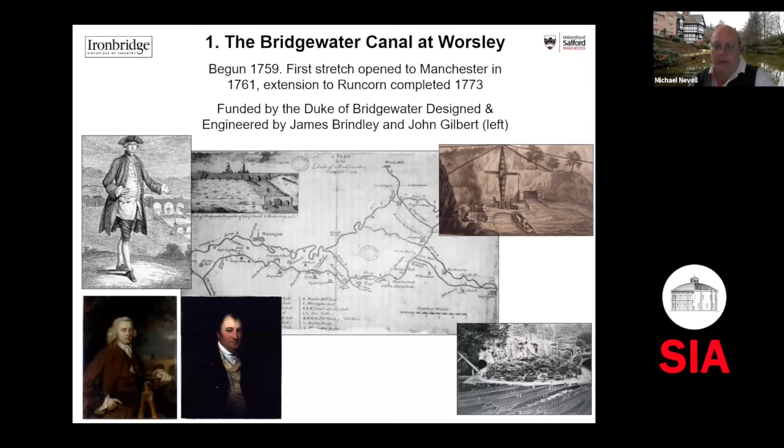And this became a tourist attraction. It opened to Manchester in 1761, and was later extended another 30 miles down the Mersey Valley towards Liverpool and opened in 1773. As soon as it was opened, people came to look at the mines, and they were looking at the canal itself. This is a contour canal with no locks until you get to Runcorn, but it's a canal that goes underground. There are 80 kilometres, 52 miles of underground canals. And this is one of the first coal canals where we get such extensive underground canals.

The way it's developed over 100 years is we end up with three major levels stretching on the surface from Worsley northwards towards Bolton, which is sort of 5 or 6 miles to the north of Worsley. But the underground canals themselves extend far further. And the volumes of coal coming out of here are quite significant. So in the late 18th century, we have 100,000 tonnes of coal a year coming out of those underground mines, and that leaps to 200,000 in the early 19th century.

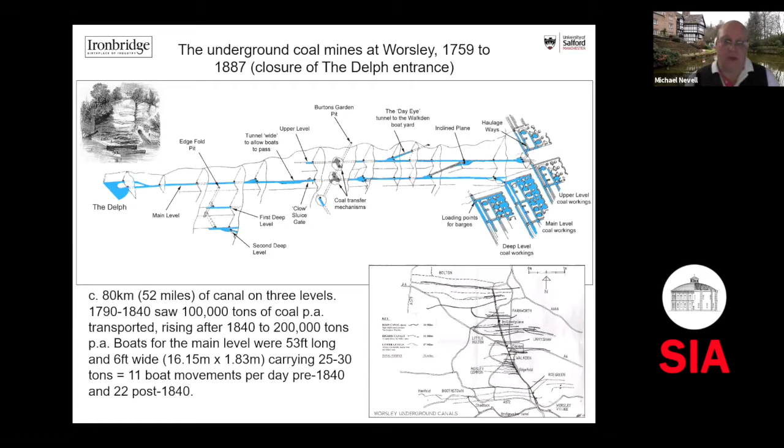And if you think of those in terms of boat movements, we're talking about perhaps a dozen boat movements going into the mine and another dozen coming out in the late 18th century, and double that by the 1840s. Now that's important because the way those boat movements were managed is reflected in the entrance to the mine. This is part of the entrance to the mine. This is Worsley Delph. It's protected as a scheduled ancient monument in the UK, and it's also listed as well. It's one of those iconic monuments of industrialisation we get in Britain.

Every industrial region in the UK will claim they're the home of the Industrial Revolution. This is Salford's claim to being the home of this part of the Industrial Revolution. As you can see here, the canal comes into the basin and the entrance to the mines, and it's very much overgrown and silted up. And this was the view in the mid-2010s, at which point Salford city teamed up with the owners of the canal, because the Bridgewater Canal is unusually in the UK still a private company.

It didn't get nationalised in the 1940s for reasons I won't go into at this point because we haven't got time, to set up a series of improvements to the canal, particularly to bring the public down into the basin here, the terminus, so that the public can see how the coal boats enter the mine.

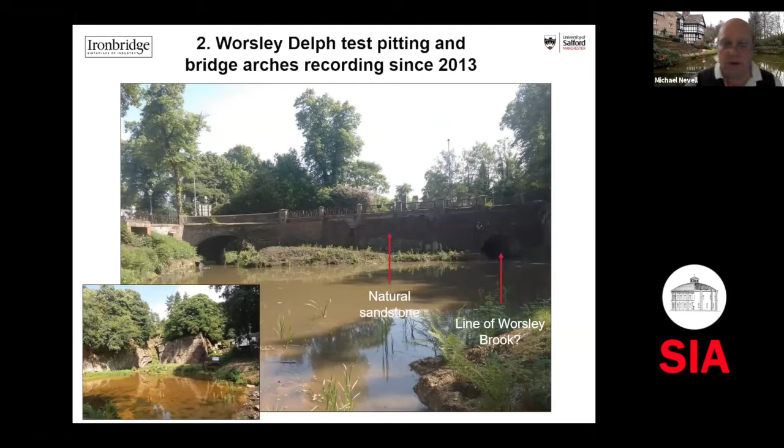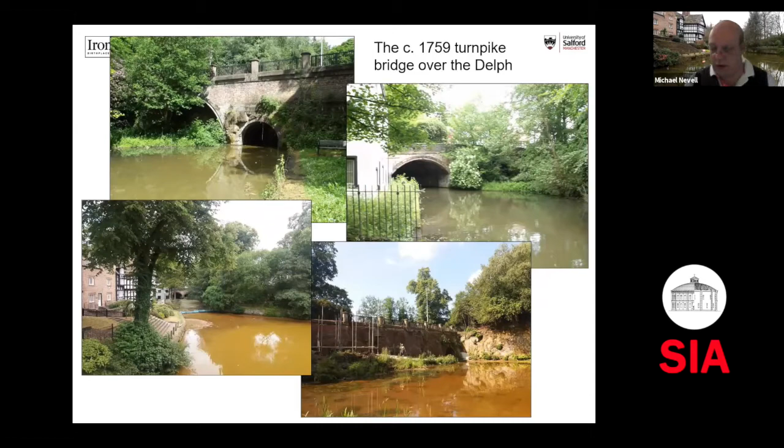Now, in order to renovate that involved works on the 1750s turnpike bridge that runs across the Delph itself. Delph is a Middle English word meaning quarry, and in fact this part of the canal uses the waters of Worsley Brook to provide, if you like, a basin and access underground into the coal deposits. And the bridge was originally built across the line of the Worsley Brook, and then later on it's expanded to cross the line of the canal.

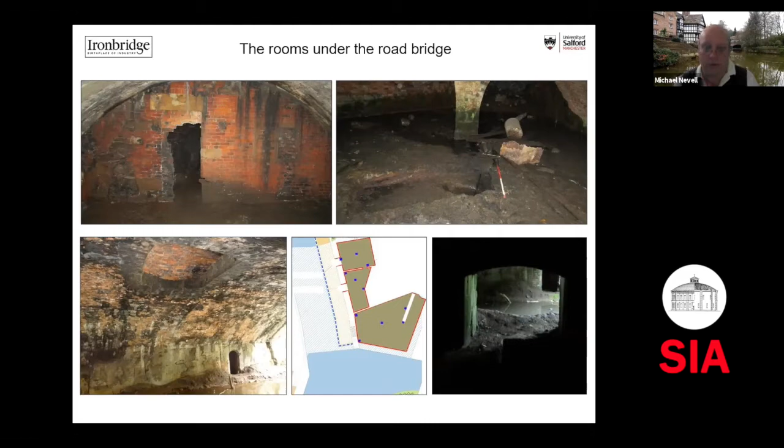And consequently, under that bridge, there's a whole series of rooms and access points, which at one point we thought we might be able to use as a heritage centre, but it proved impractical. But these are rooms that were built under the bridge in order to control boats coming into and out of the Delph area, into and out of the mine. And also there's access to the local corn mill, which from the late 18th century was steam powered, using coal directly from the mines. And you can see some of the archaeological fieldwork we did surveying the bridge here.

Once we got into the Delph in 2018 and 2019, the major focus of the archaeology was around the building of a new viewing platform on the eastern side of the Delph. And that, rather unexpectedly, revealed two new road tunnels giving access to the eastern side of the Delph. And you can see the road tunnels here and the survey work we were doing in the Delph. Nobody had seen these before, and they're not recorded on any maps, and it's actually very difficult to see them in the documents. So these are completely unexpected.

And not only were these unexpected, but there were also two quays for tying up boats that were located as the Delph was dredged in 2018, 2019. And all these features, the two quays, the boats, and these two road tunnels, are related to the way in which the boats are managed coming into and out of the Delph. But also we think the tunnel you can see here is linking directly to the manorial corn mill. So it looks like that was used as a way of bringing coal directly from the mine to the corn mill itself.

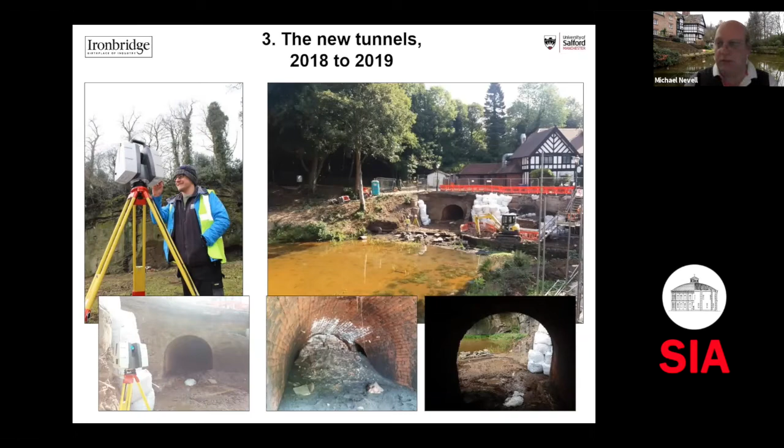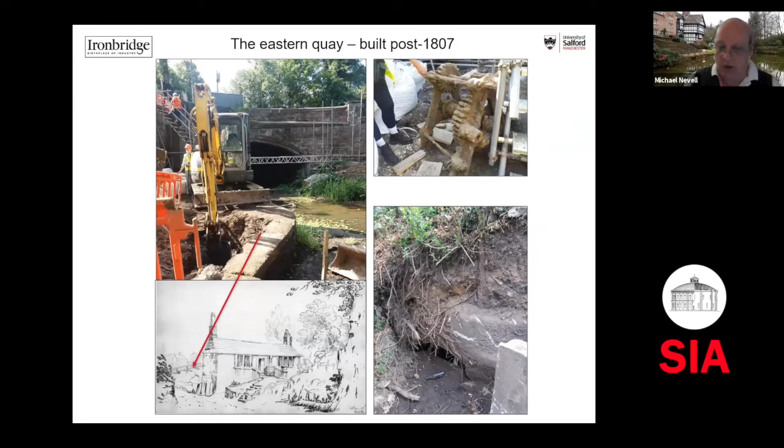You can see here some of the features of the first quay that we found on the eastern side of the Delph, the stone wall defining the quay, and also we had an early 19th century iron winch that we were able to preserve and is now on display. And when we went back and looked at some of the early views of this site from about 1807, we were able to spot that the quay had been shown on one of these early views, which I've arrowed with that big red arrow on that slide there. But you have to know it's there to understand that feature.

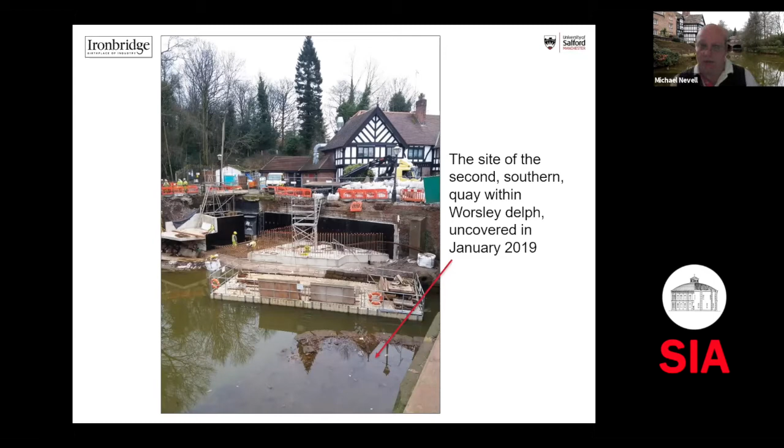In that dredging process, we also came up with evidence for some of the mine boats running into and out of the Bridgewater Canal. There were 3 types of mine boats. There were 2 types of narrowboat, some box boats for taking the coal, and there was also a broader beam, 14-foot wide, for crossing the Mersey estuary from the locks at Runcorn to Liverpool Port.

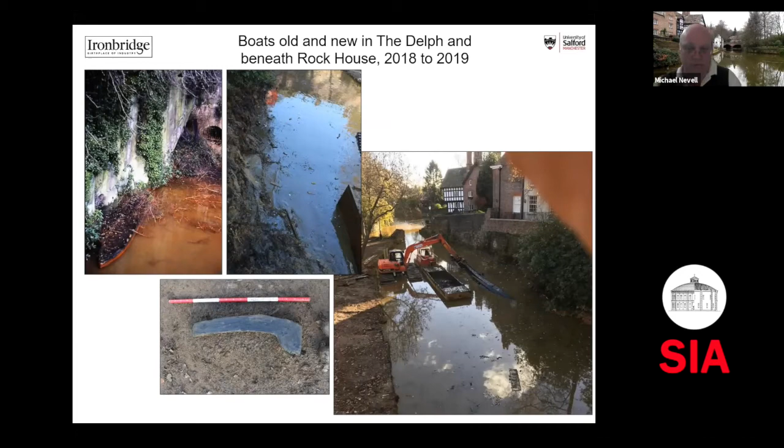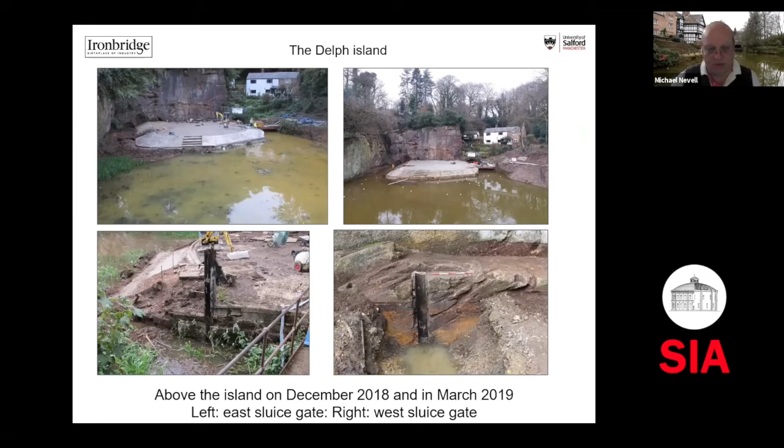And we also worked with 2 local historians who've been working at Worsley since the 1960s, John Aldred and Judith Atkinson. In fact, Judith Atkinson was amongst the last people to enter by boat the underground tunnels, and she did that in a trip in the 1990s, but an earlier one in the late 1960s, early 1970s.

And so we've tried to understand how the Delph worked as a control point for bringing in the empty mine boats, and then taking out the full boats, the boats full of coal. Each boat carried between 20 and 30 tons, and that's a major logistical feat to get them in and out of the mine, if you bear in mind that by the 1790s there's 100,000 tons a year coming out of here.

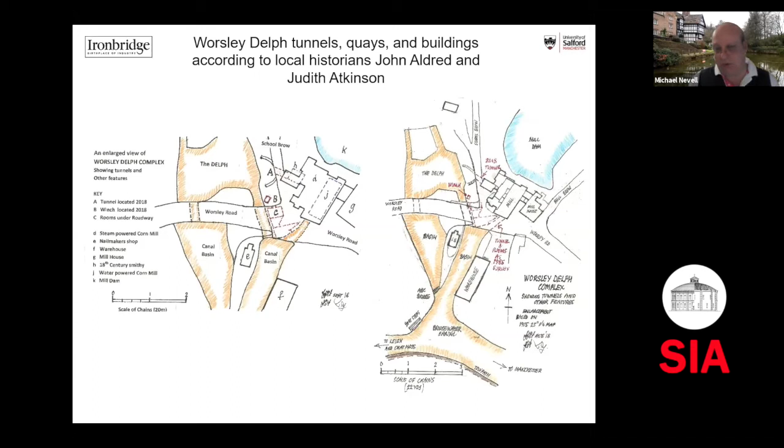It's very easy just to focus on the Bridgewater Canal itself as a major industrial monument, as an iconic industrial feature, and indeed the entrance to the 80 kilometres, 50 miles of tunnels. But in 2018 and 2019, we also had the opportunity to look at the boat and timber yards that supported the canal and the underground coal mines. And that's in an area now known as Worsley Green.

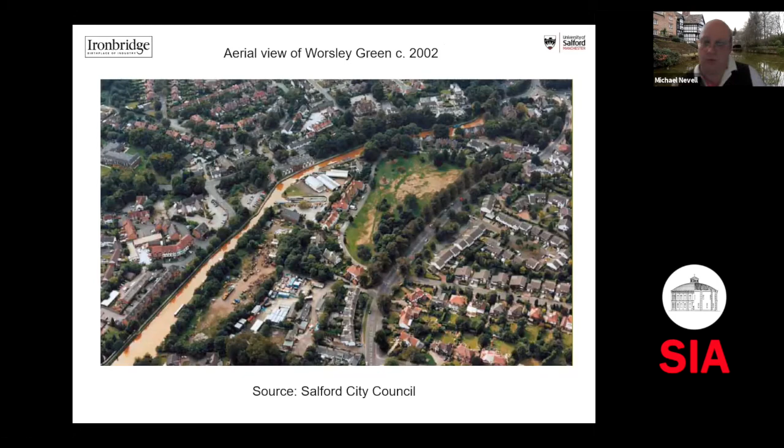So we targeted the manager's house, which was an 18th century cottage which seems to have been repurposed as the works manager's house. Again, just the one photograph left of it, but when we excavated, we found substantial remains of the basement and the stairs into the basement, and we also had 16th and 17th century pottery that presumably predates all of this activity.

And secondly, we looked at the wagon repair shop built on the green in the 1860s to service the railway lines that were put in for the new collieries to the east of Worsley Delph. Those railway lines had access to the canal as well. So we were able to look at the floor of that wagon repair shop, record some of the evidence for metalworking on the site. And we also came across evidence for earlier activity: there's actually a gasworks from the early 19th century that predates the wagon repair shop on this site.

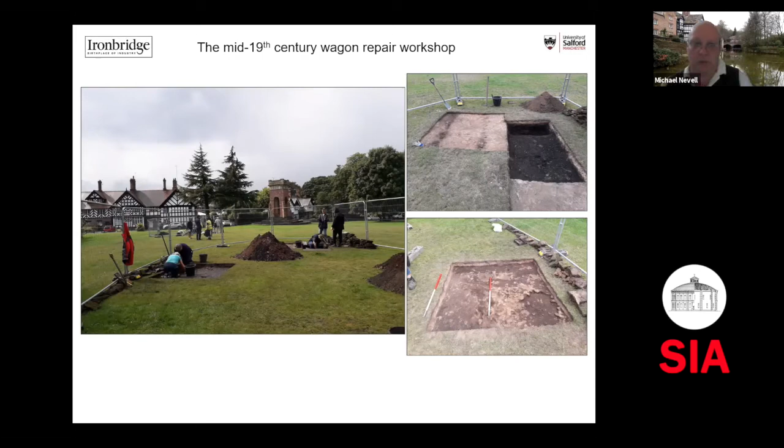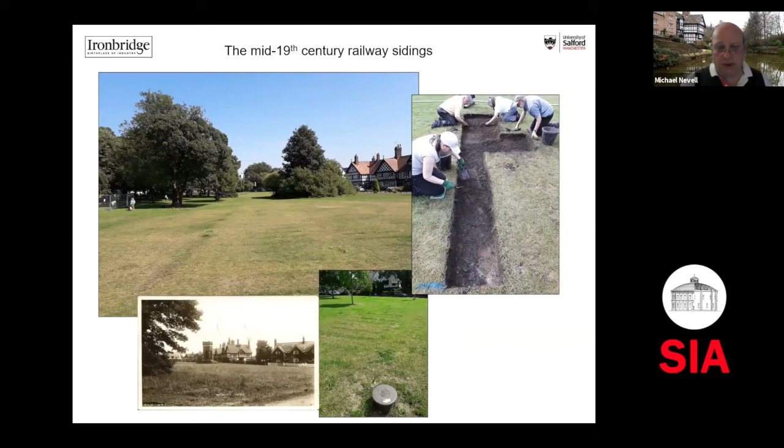And one of the reasons we're doing this is because there is no reference today on this site to the fact that this was a major industrial hamlet and community. You can see this black and white postcard here from about 1920 that just shows the green, the village and the arts and crafts houses around it. And what we've been trying to do is confirm that there is archaeology here, the nature of that archaeology, and the plan was to go back in 2020. So obviously that didn't happen. So we're now going to try and go back later on this year.

So although I've been working here with volunteers and students for 6 years, I'm really hopeful that we can go back and finish that work on the workshops on the Delph and on the green, and understand more how the Bridgewater Canal worked as a canal and how the coal mining also influenced the development of the village. And if you want to read more about this, there's a number of recent publications in the last couple of years on the Bridgewater Canal and also on the Delph and the coal community at Worsley.